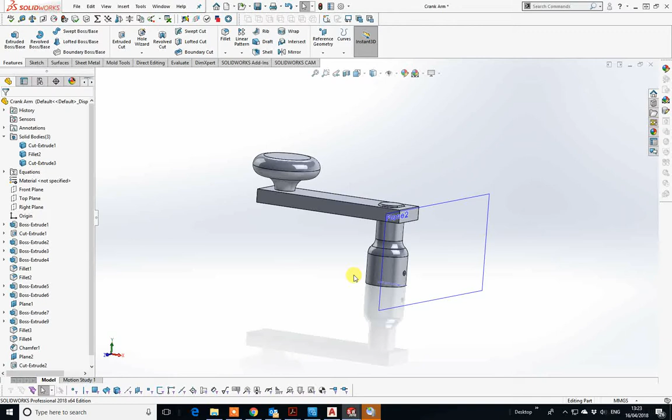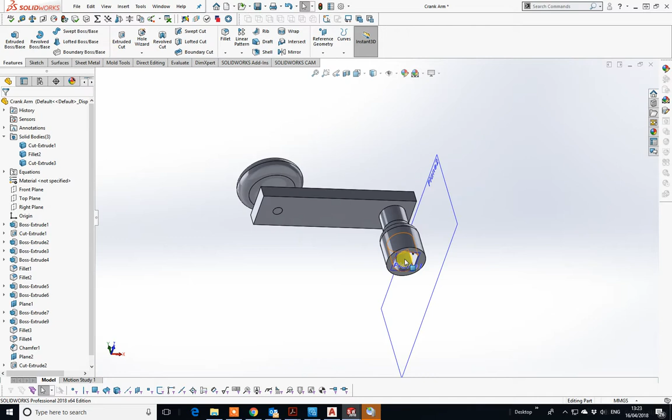Okay, you can see we've got 3 parts here in our 3D drawing at the moment. I'm actually going to now try and create the yoke, the male yoke, which is what this part actually connects to for turning the grinder. I've just got to be absolutely certain here I've got the right part. So I'm just going to measure something just for a second.

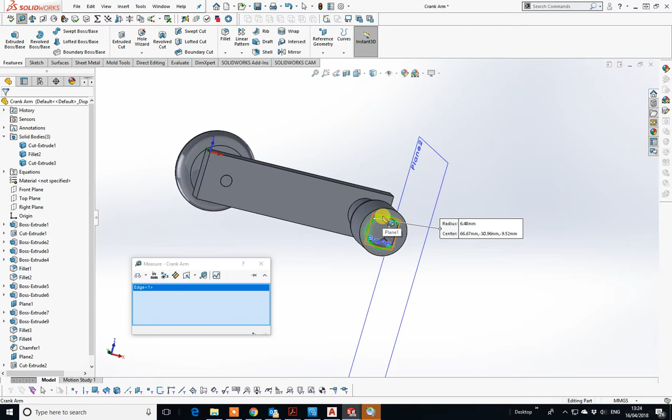So go out to my little measuring tape. I'm just going to click on that circumference there, 6.48. And does that correspond with the part that I want to look at? It does. Yes, that's absolutely fine. Okay. Right, I'm going to leave that to one side for a sec.

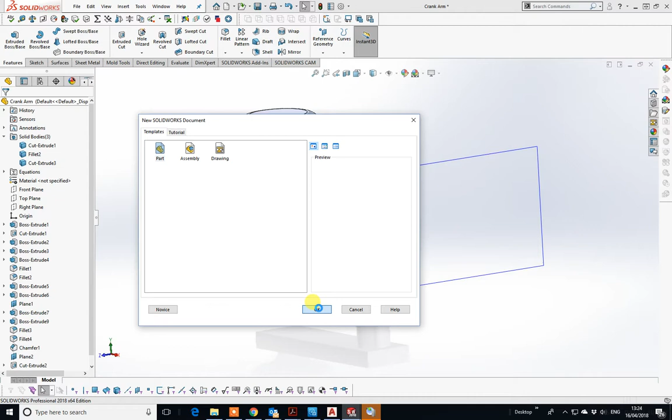I'm actually going to create the other part, the yoke, separate because we've got the dimensions, but we could actually make it up this. I'll do it as a separate drawing. So go to new, I'm going to go to part, okay. And if you want to get your yoke male drawings right, because I'm going to do this in a way, because you'll notice if you look at the middle elevation, look very, very closely, there's a little nick there which we have to do in a particular way.

So go to new, I'm going to go to sketch, and I'm going to do this in the right plane this time. Doesn't really matter which planes you do them in, right or left, for this, because we will twist it in the assembly. So details I've got there, I can do this in several ways. I'm actually going to do it as a column and cut away.

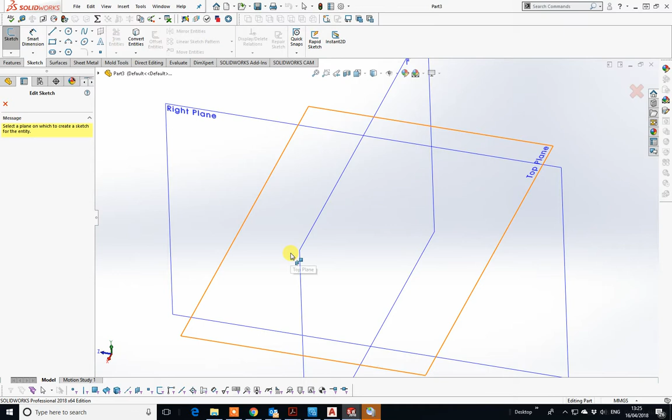So let's come out of that, because I'm going to come in from the plan view. I'm just going to go sketch, and this way let's just see what we've got. Right plane, top, do the top plane. So draw a circle right in the center there. Okay, and I'm going to give that a smart dimension there, and that diameter is 38.10, so 38.10.

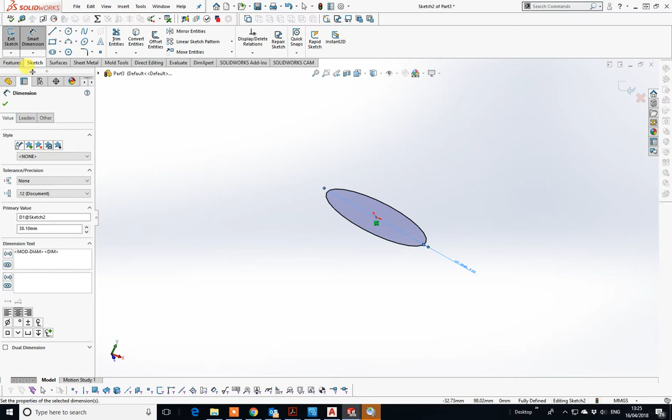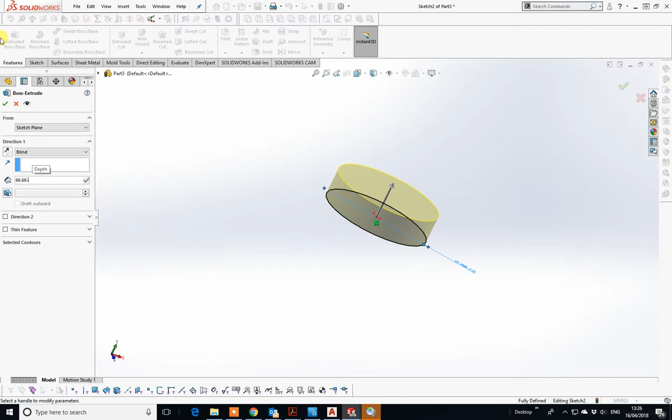And I'm going to extrude feature, extrude boss base to a full depth of, let's go, right, I'm going to put in here 66.68 minus 19.05. Okay, so that's 47.63. So I've used that as a calculator on that one. So there's that part there.

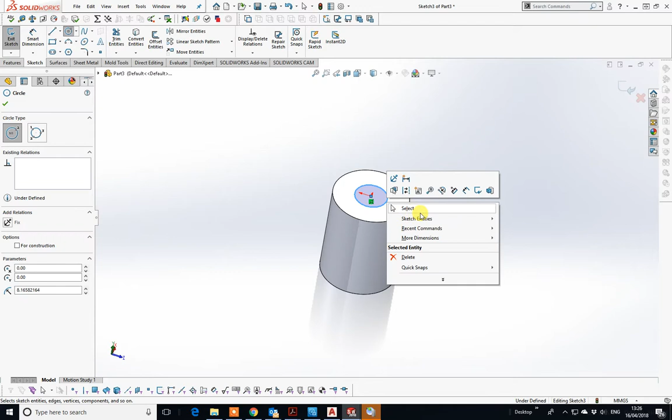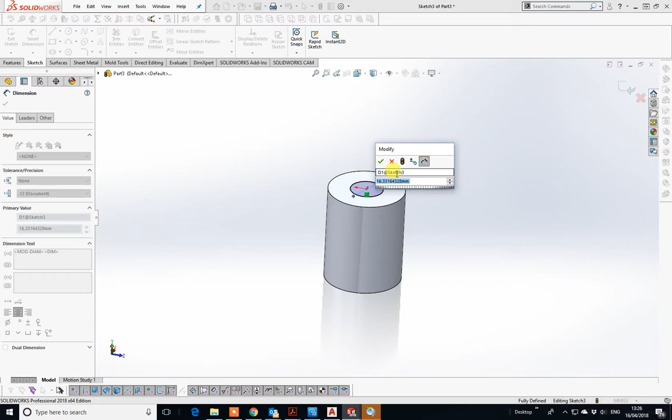I'm now going to draw another circle. So sketch a circle. Go on top of that plane, from there to there. Just check that is actually concentric. And I'll give that another dimension. This is the top part, so I know that outer circumference is 6.35. Okay, so let's put that in at 6.35 times 2.

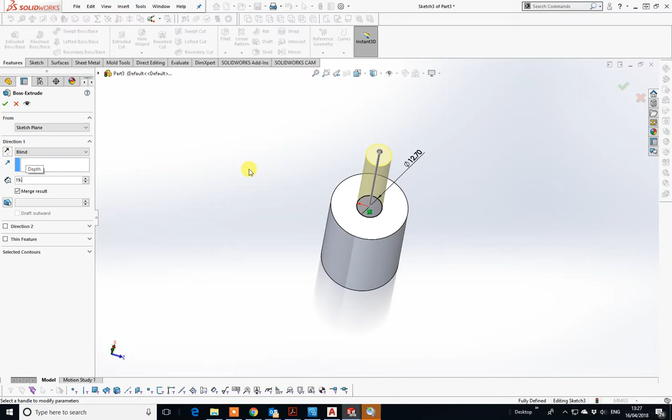Okay, so that's 12.7. I'm then going to extrude, not extrude cut. I didn't want to do that. Let's get rid of that. Extrude boss base. I want to go up. And this time I want to go up by 19.05. And again, just don't forget that these are converted from inches. So I'm starting the sort of main resemblance of what I've got there.

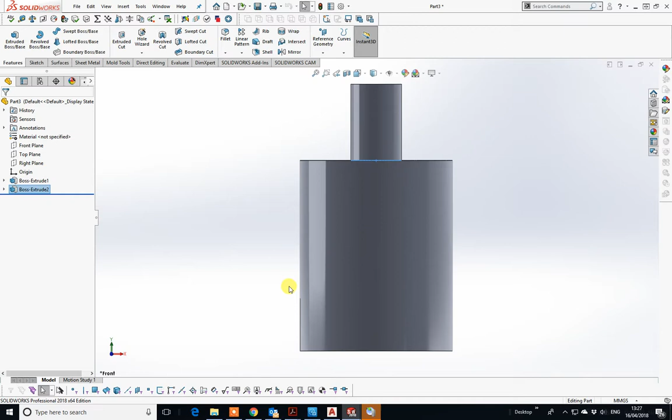So let's just take a view there. And I've got other dimensions here as well. I've got a circle, so I'm going to put in a centre line now. But for that I need to actually see what planes I've got. Let's just see that. Right, that's mid plane, that's good. So let's just right hand click and make that visible. And bring it back to the front plane.

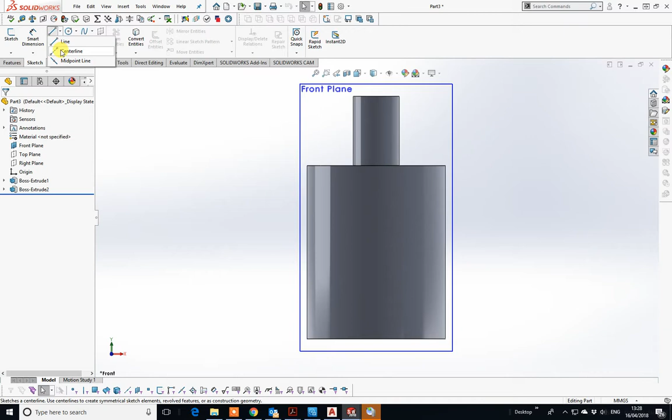I'm then in that plane, I'm going to sketch a centre line. Just click on the plane. And I'm going to go from the top there to the bottom there. So I've got a centre line, and that's halfway inside the cylinder itself.

Now, I've got other dimensions here as well. You'll see a 27.94 on there. I'll come back to that in a moment. That shouldn't really actually be there. But I've got one of 38.10. So I want to draw a circle. And this is going to be a sort of datum feature.

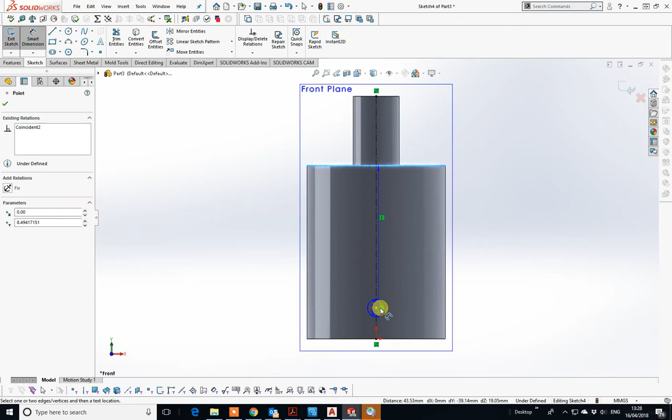And I want to measure on that point there to that point there. And I'll bring that out. And I'll put in 38.10. Okay, and I'll give that a dimension of, it is a radius. Well, it's not a radius, it's a diameter of 9.53.

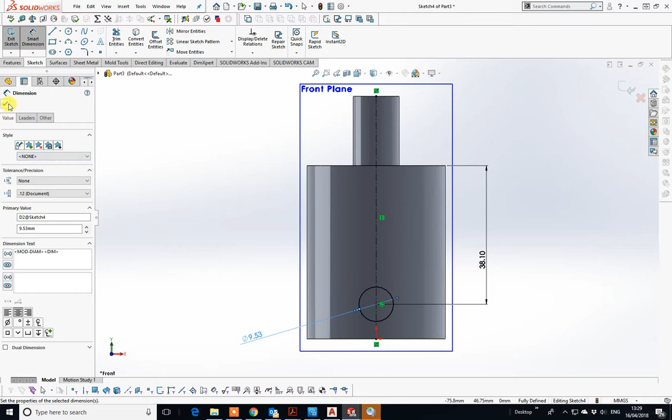Okay, let's just give that a tick. I'm now also going to do another circle from the centre of there, to coincidence to that one there. You can see it's black because I've already got other datums that it's referencing from. I'm also going to draw some straight lines from there straight up.

It has a hole instead on that one. So I'm just going to draw another line in. That actual 27.94 is the centre for the arcs coming that way. So if I draw, let's just put a centre line around here somewhere.

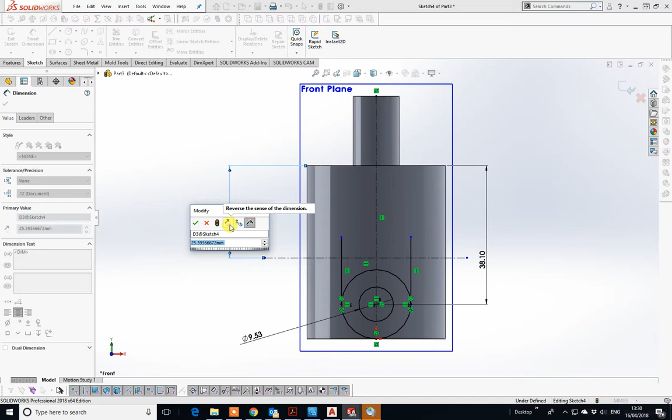Okay, and I will dimension that from there to there. I'll put it over there just for now and put that in at 27.94. Okay, and it's gone black. So I now know that that is the centre of the other circles that I have to do.

So let's just put those in. So let's just put that up to that point there. Okay, and that's a radius of 9.53. So I'll put a smart dimension in, put that on there, and let's put that in at 9.53 times 2.

So it's gone black. So I've now got a point up the top there I can use, and I'm going to mirror this one across. So mirror entities, it asks me entities to mirror, so on that circle, and mirror about that centre line, and there we go. So straight across.

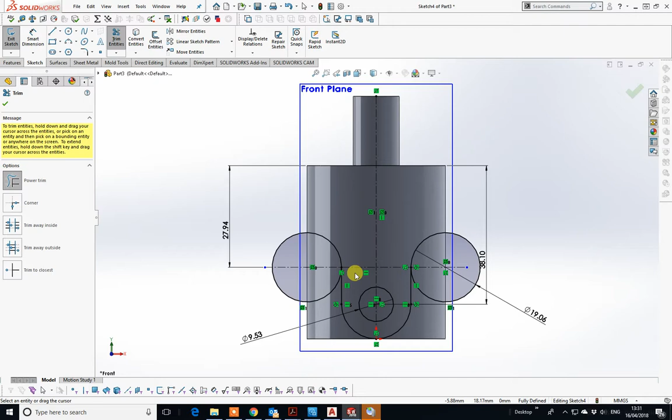I'm not going to draw a line across, but I am just tidy it up a bit. I'm just going to trim that away. I'll trim that away. And what else shall I do here? Let's just trim that away, and that way you'll start to see what I'm on about, is that actual shape of that part. But I'm also very conscious of that little nick there, so there is something that travels through, but I shall leave that for now.

And I will just add in, I don't have to be too particular about this. I'm just going to come down here, go right away across to there. If I just hover over that, it comes down. Oh, I didn't do what I wanted it to do.

Let's just bring that back, let's just Control Z. Control Z is probably your best friend, but also your worst enemy. So, there we go, let's go line from there, just about there, and another line from there down to there.

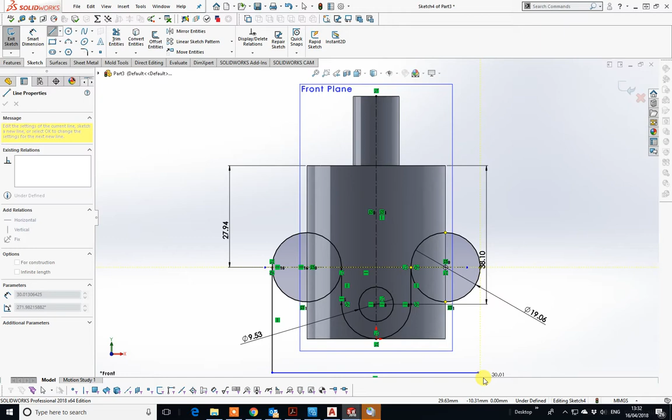And if I just extend, so extend is opposite to trim, same as in the AutoCAD command, but this time it's a little bit more intelligent than the AutoCAD. Now I need to go to my trim command, just trim that back. And the only reason that is blue is because it's not been defined.

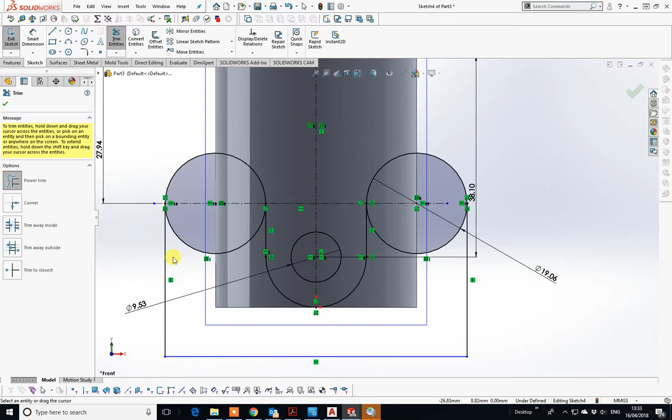If I wanted to make it black, I'd just take a measurement from there down to there. I just need to trim back, because I'm still in trim, so I'll take that out and that out. I now see where all the grey part is.

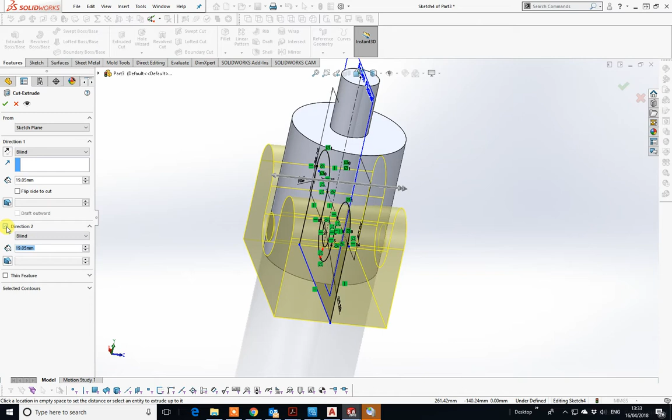I want to go to my features menu and extrude cut. Okay, now you'll notice if I just swivel that to one side and it does it in one direction. Now on here I can put a direction 2 in and it does it all the way through. Just do the green tick. Okay, you'll now see that I have the bases of that part. So I've created a sketch, a tool to actually take that through.

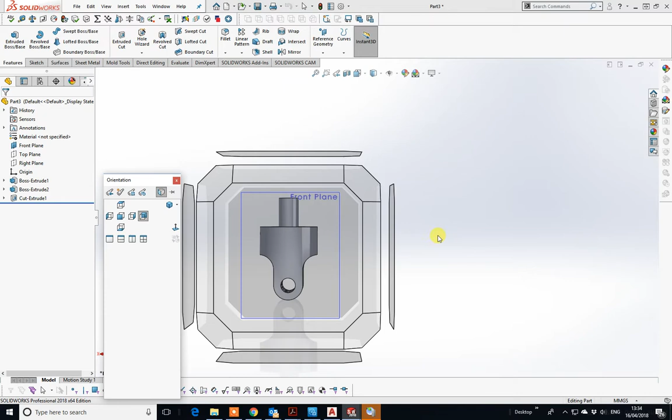Now if you remember rightly, I said there was a little strange thing going on here. So press the space bar, I'm going to pick up on that side. So I'm going to go through here and you'll notice that on both side elevations. And we do have dimensions for those.

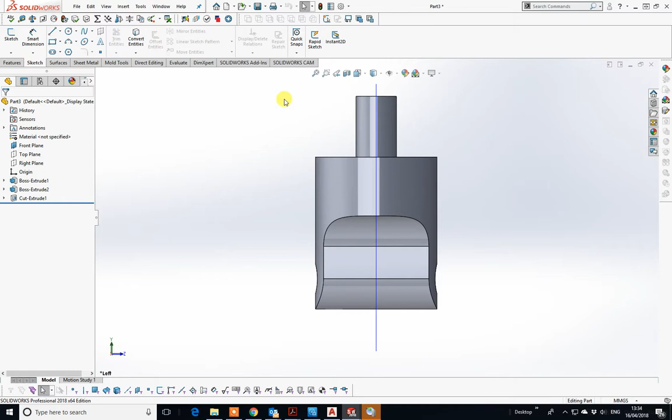So a quick and easy way to do this is actually use that point there as my datum point. So I am going to draw in a sketch. Let's pick up which one am I going to do in. Now that should be down the centre. Perfect. So let's just show that.

And I will take my rectangular tool. I'm just going to randomly draw a rectangle.

And I'm going to put in a centre line as well. I should have done that first, but it doesn't really matter. So let's just take one from there down to there. That should be black - you won't see it.

Now I can actually append some particular rules to this. So if I click on that line there, hold the shift key down, select the centre line and the other line. Okay, let go.

I have all these options up here - make horizontal, vertical, collinear. You've seen these before. Make parallel, equal. I want to pick on the symmetry one, so make symmetrical. You notice that jumps in just when it's in my hands because I actually made that action then. So I just tick that one there.

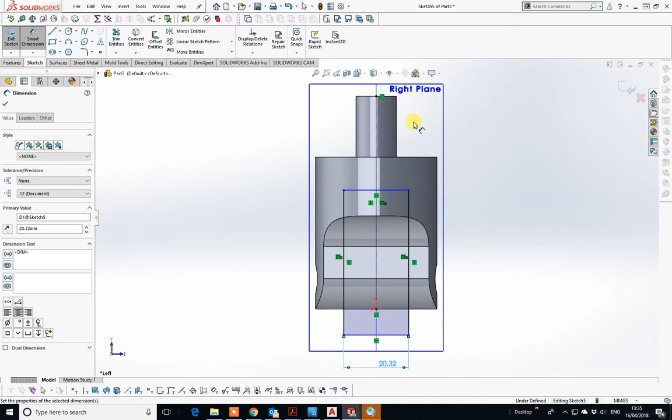I then want to put my smart dimension in. So across there and come down, and I know that that is 20.32. Now from the top there, I'll put another dimension from that line there to that there. And that, according to my table, is 18.42.

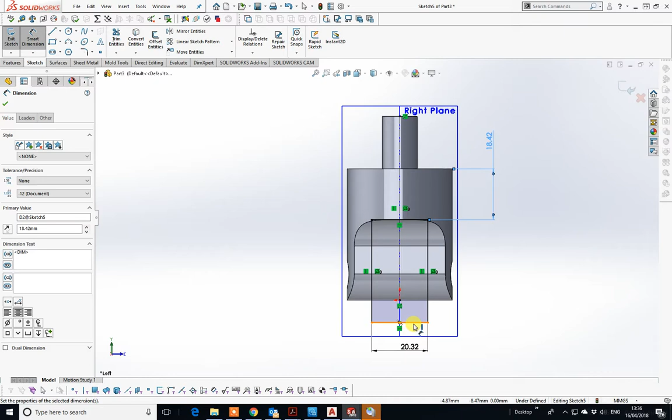And you'll see there that it actually clips the top of that, and there is reasons for that you'll see in the assembly. Now I could put a dimension down here. I don't need to make it fully defined, but I'm cutting through anyway. Just tick that one and go to features, extrude cut.

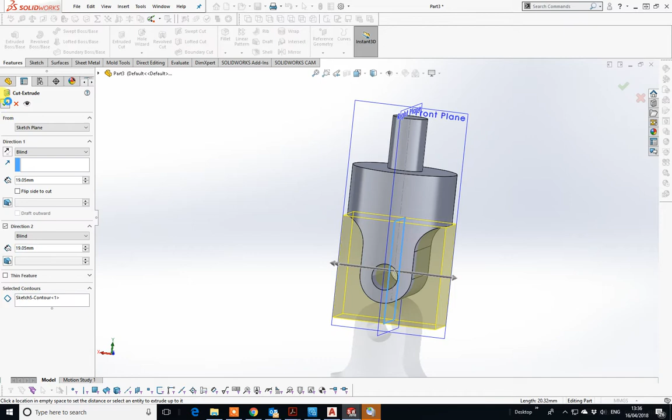This is exactly the same as the last one. Okay, and I pick on that sketch. You'll notice halfway, so I just go to direction 2 and green tick. And you'll now see that I actually have that part.

Okay, what I haven't done is the top part, so let's just put that in quickly. It's the same as we've done with all the others. So I'm just going to make sure I get it in the right orientation. So I need to put a flat on that face there.

Now you can do it in two ways. We can either create a line, a block here that cuts all the way down, or I can put a sketch here that cuts in towards the cylinder itself. The easiest way to do this is, because I've got height features and I've got width features, is probably to do it from the top.

But before I do that, I'm actually going to put that chamfer in, and again, that's 45. I assume - you should never assume anything - but I think it's 0.79, which is the same as there. So I'm just going to click on that top one. Okay, that's done that for me.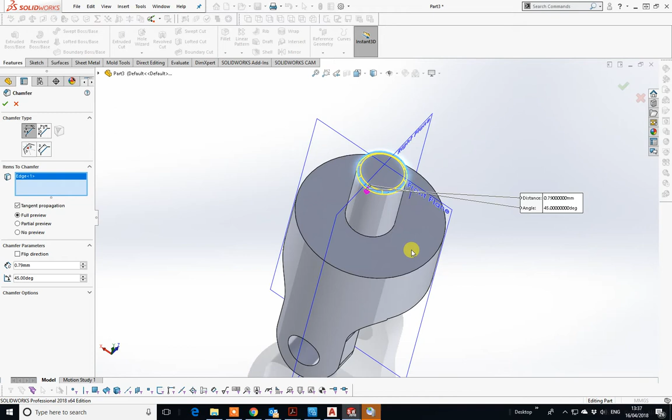Now let's do this one. I'm going to sketch on that top surface. I'll put my rectangle in again, like I did before, because I know I'm going to cut away something. That's a space bar to get that view up.

I am now going to measure. Let's just come here, let's go back to measure - well, actually, dimension. Okay, and that there, as far as I can see, should be 4.76.

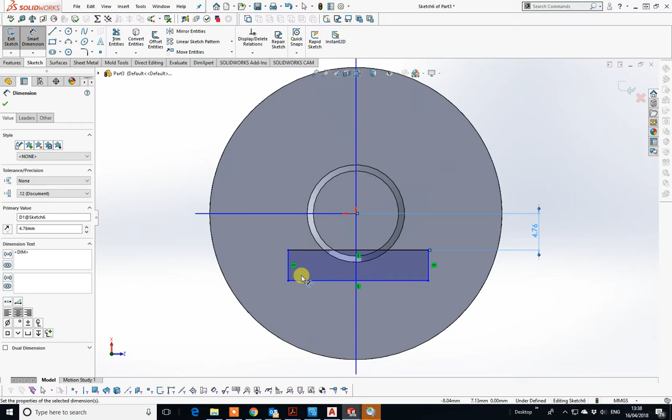Okay, that's good. Now, I could do a symmetrical thing here, but I don't need to, because it's just a tool to create this. And I need to extrude down, extrude cut, so features, extrude cut. Okay, and that distance, as you'll see from your paperwork, that it is 6.35 off the bottom of that.

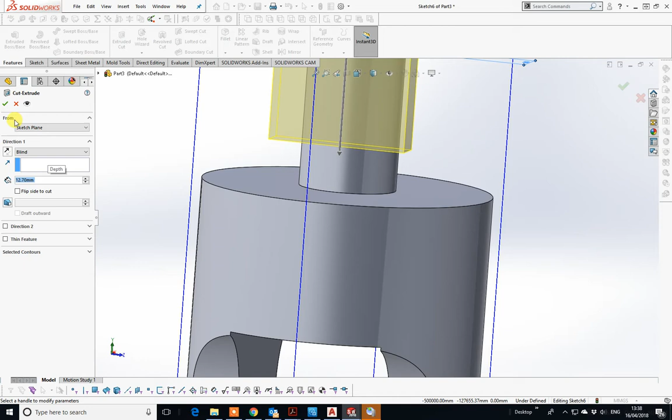So I'm going to put in 19.05, which is what's in there. And I'm going to minus by that difference, so 6.35. And then there we go. And there's my part there.

Now I'll come and do the female one in a second under what they call a configuration. So do bear with me. See you in a minute.